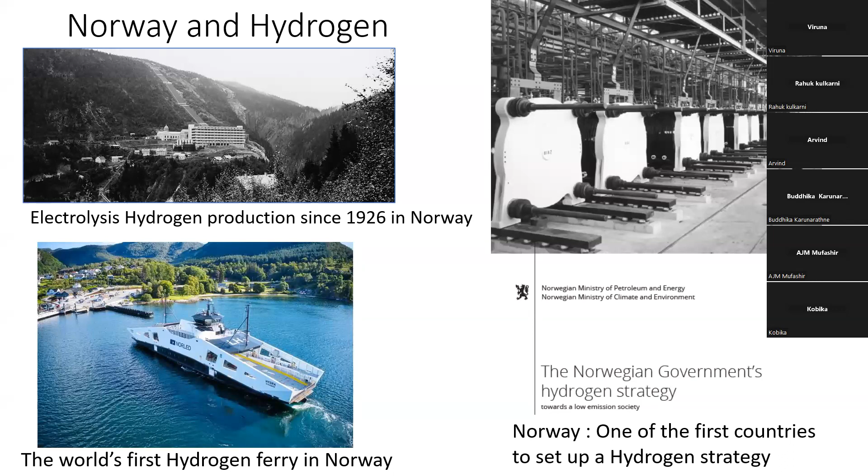Norway has the ambition to become carbon free by 2050, and before 2030, Norway aims to reduce carbon output by 55% compared to 1990. So hydrogen is going to play a big role, and Norway has focused on hydrogen.

We have established two different environment-friendly energy research centers on hydrogen and ammonia in Norway. One is called HyValue, and the other is HYDROGENi. We, HVL, are part of HyValue, so my colleague will explain what we are working on in these energy centers later on.

As far as these courses are concerned, we have been offering three courses in Norway: hydrogen for decision makers, hydrogen for management and administration, and hydrogen for technical personnel. Today we are going to offer this course for Sri Lanka and India, and we will see how we go further from here. The objectives and details of these courses will be given by my colleague, Dr. Jonathan, later on.

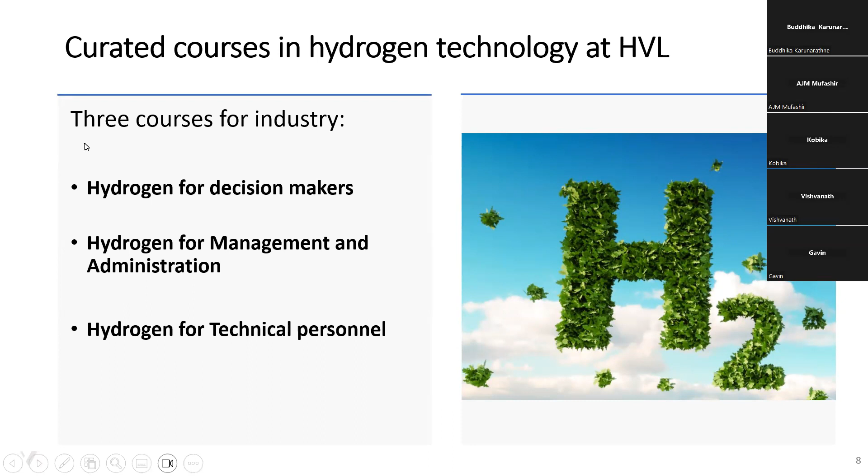Welcome, Velaug. Thank you, Dayalan, for the introduction. It's very nice to be here today and meet some of our friends from India and Sri Lanka again. Thank you for the invitation. We met some of you in India in September this year, and that was very nice. Let me just share my screen first.

I will first give a very brief introduction to our research center, HyValue. I am the center deputy of the center, and I also work as an associate professor at our university, Western Norway University of Applied Sciences.

The Norwegian government launched a hydrogen strategy a couple of years back. This strategy included awarding hydrogen hubs and some pilot projects within a few years, and within 2030, realization of full-scale hydrogen projects in the industry. This hydrogen strategy also included research, so the establishment of dedicated research centers on hydrogen and ammonia.

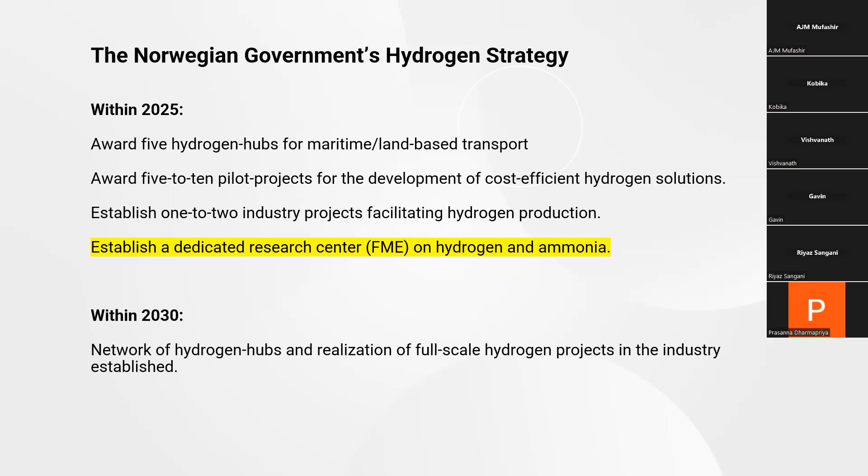Last year, our research center, HyValue, was awarded, and we started our work. This is a research center that is going to last for 8 years, and we are financed partly by the Norwegian Research Council, and partly by own financing from each of our partners. Now let me just organize my screen a bit.

The work that we are going to do is divided into 6 different topics or work packages that together will cover the whole value chain of hydrogen. When establishing hydrogen technology, it's not just technical aspects that are important. We cover everything from novel production methods, through storage technologies, distribution and transport of hydrogen, and all the way to end user applications.

These are the technical areas, but it's also important, if we want to succeed, to look at the whole picture. So we have also included safety and risk science aspects: how can we build this hydrogen economy in a safe way? We have also included social and societal aspects: will people accept this new technology, and how can we embed it in society in the best way? And finally, we have included rules, regulations, business models, and markets: how can one do this in a way that is profitable?

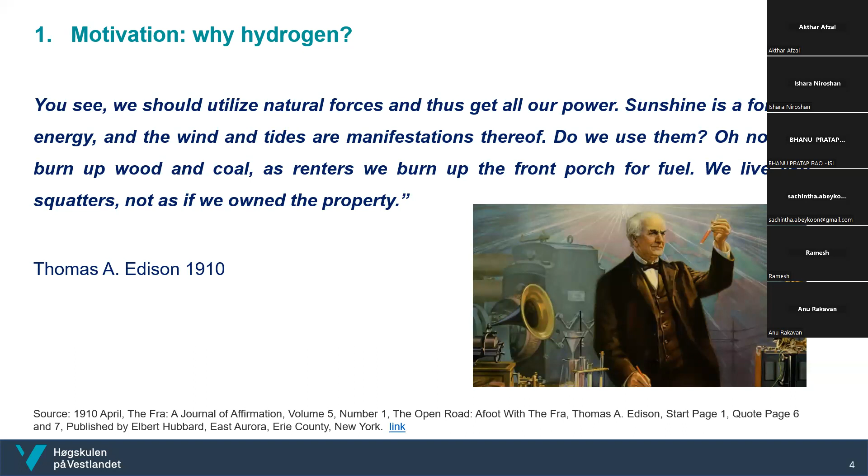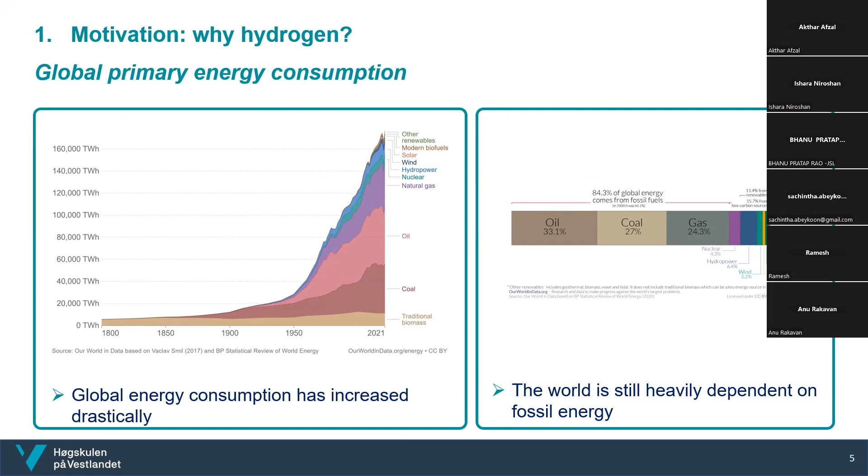So now let's see if anything has changed since the Edison times. The global energy consumption has increased drastically in the last century, and it will continue to grow. And if we look at the distribution of energy consumption by energy type, it is clear that the world is still heavily dependent on fossil energy. Oil and coal are the dominant energy sources, with gas in third place.

But we could no longer burn our own front porch for fuel, as Edison said, and therefore countries all over the world set efforts to reduce their greenhouse gas emissions. Norway and the European Union set the goal to reduce CO2 emissions by 55% by 2030 and to establish a sustainable transition to net zero greenhouse gas emissions by 2050. India announced in 2021 that it aims to reach net zero emissions by 2070 and to meet 50% of its electricity requirements from renewable energy sources by 2030.

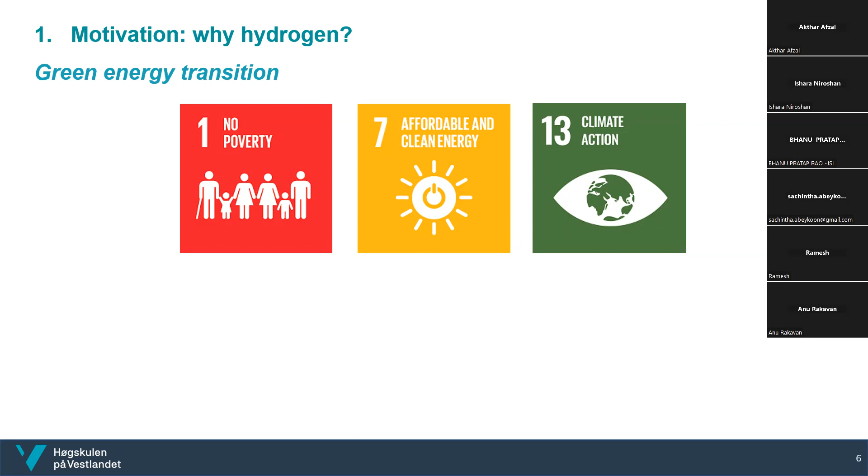And the Sri Lankan government set a goal of achieving 70% of renewable energy generation by 2030, and it aims to become carbon neutral by 2050. The use of renewable energy sources is essential to ensure a sustainable future, but renewable energy is intermittent, and green hydrogen could be the solution to the intermittency issue of renewable energy.

Hydrogen and hydrogen carriers would also allow transport of energy from regions with abundant solar and wind resources to energy-hungry regions, as for example from Norway to Europe or from Australia to Japan. It's also been discussed that India can export green hydrogen to Europe. Hydrogen will also contribute to decarbonization of transport, especially for heavy duty or long distance transport, and for the decarbonization of industry, both as energy carrier and as feedstock.

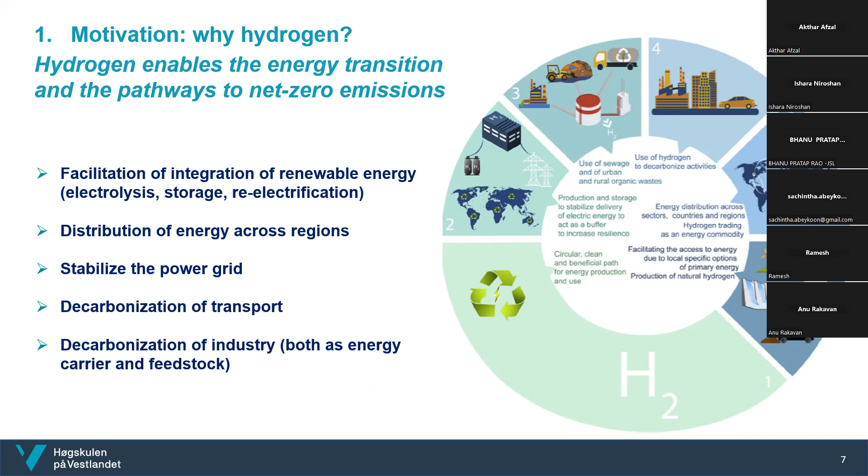But what is actually hydrogen? Hydrogen is element number 1 in the periodic table of elements. It is the lightest element. A hydrogen atom consists of a negatively charged electron, which is orbiting a positively charged proton.

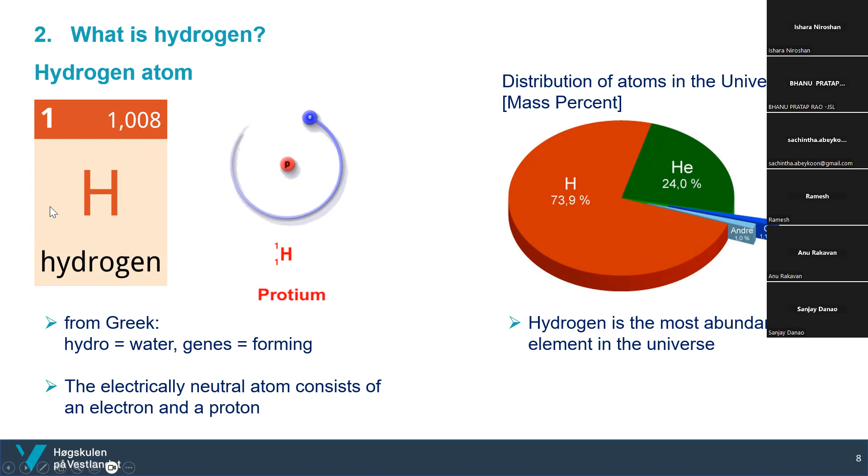Hydrogen is the most abundant chemical substance in the universe, and in mass percentage, hydrogen makes up 74% of all atoms in the universe, and over 90% by number of atoms.

Stars, such as the sun, are mainly composed of hydrogen in the plasma state. Hydrogen plasma consists of hydrogen ions, separate protons and electrons. The sun's energy production is the result of the nuclear fusion of hydrogen to helium. Every second, 4 million tons of hydrogen are fused on the sun and converted into helium and energy. So hydrogen warms up our Earth.

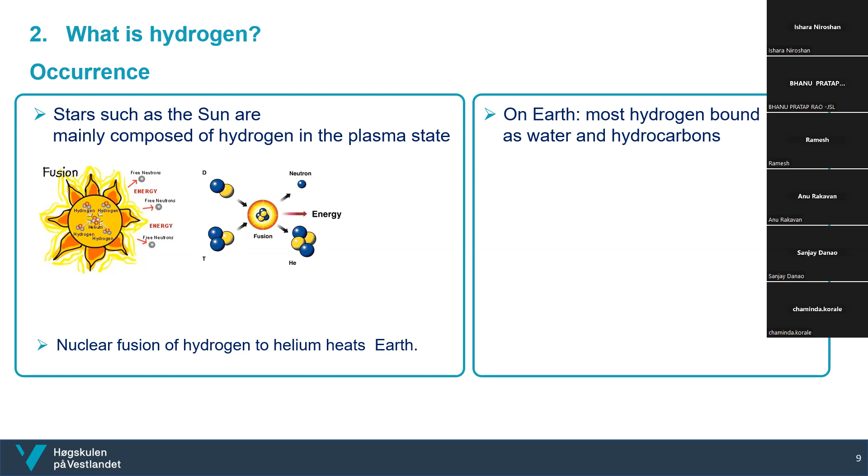On Earth, most hydrogen is chemically bound as water and hydrocarbons. And even in our body, the third most common element by weight is hydrogen.

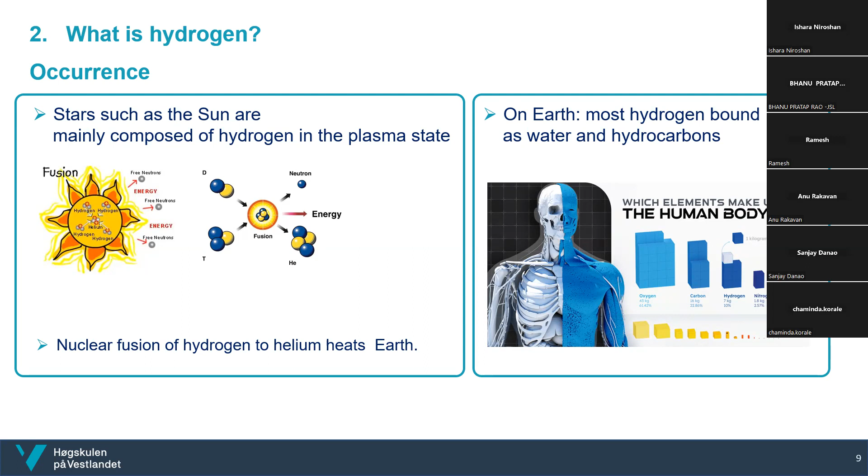But hydrogen, about which we will talk today, is molecular hydrogen or dihydrogen, because it consists of 2 hydrogen atoms. Two hydrogen atoms come together and share their 2 electrons in a covalent bond. So molecular hydrogen, or the H2 molecule, consists of 2 hydrogen atoms sharing their electrons.

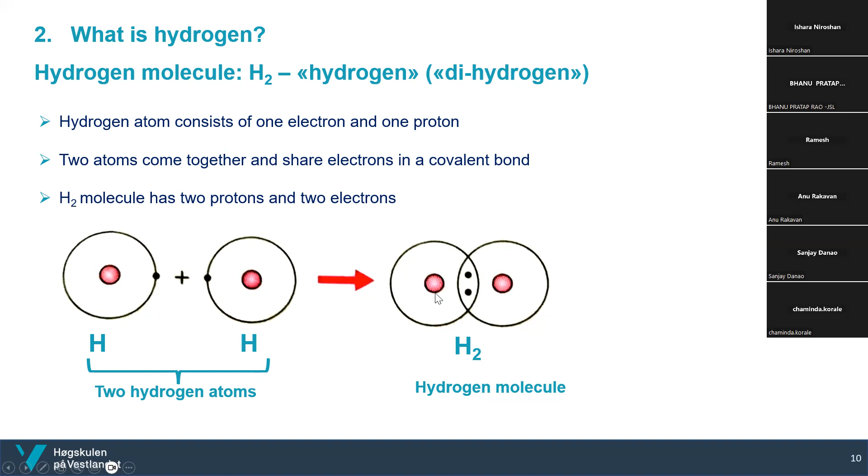A little bit about properties of hydrogen. It is a colorless, odorless, and non-toxic gas under normal conditions on Earth. It has minimal health hazards as a gas. However, it can lead to suffocation by substitution of oxygen, or if we have liquid hydrogen, it possesses a cold burn hazard.

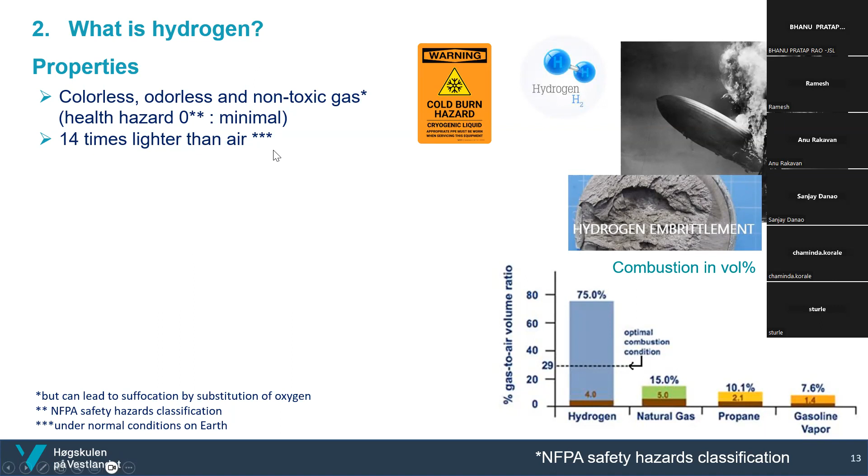Hydrogen is 14 times lighter than air, and this also influences how it behaves. For example, if there is a hydrogen leak, hydrogen will very quickly mix with air, and the mixture is extremely explosive. But at the same time, if the leakage happened outside, hydrogen will disappear very soon, and the hazard will be lowered.

Hydrogen molecules are very small, and therefore it is very difficult to design equipment which is hydrogen tight. It leaks easily, and as it is a colorless, odorless, and non-toxic gas, it is difficult to detect hydrogen leaks without special sensors. Also, small hydrogen molecules easily penetrate into the crystal structure of different materials, for example metals, and it leads to mechanical failure of the materials, so-called hydrogen brittleness.

As I already mentioned, hydrogen is extremely flammable. It has extreme fire hazard. It is combustible in a wide gas-to-air volume ratio. If we look at this diagram, which shows the gas-to-air volume ratio where it is flammable, hydrogen is flammable between 4 to 75 volumetric percent. And for example, natural gas is only flammable from 5 to 15 percent.

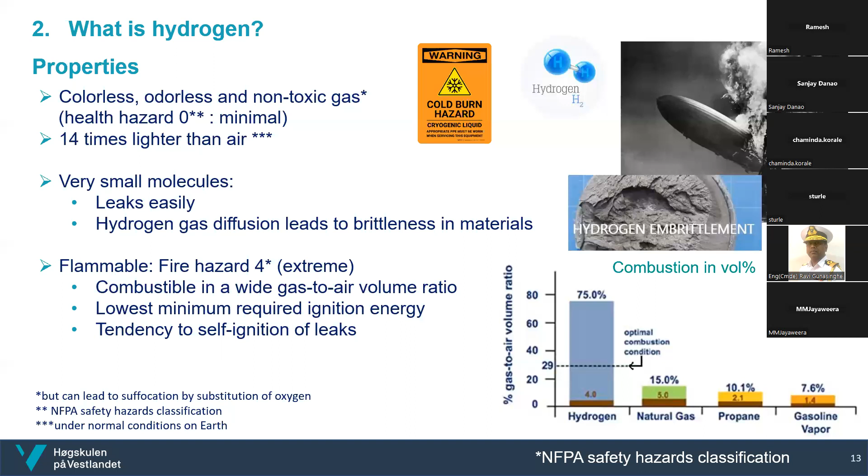Also, hydrogen requires a minimum energy for self-ignition if compared to other gases, like natural gas or propane. So leaks also have a tendency toward self-ignition.

If we look at the table with properties of hydrogen compared to properties of methane, we can see that the boiling point of hydrogen is almost 100 degrees C lower than for methane. So hydrogen has the second lowest boiling point and melting point of all substances, only after helium. It means that it is extremely energy intensive - we need to put a lot of energy to liquefy it.

Also, gravimetric energy density, that means energy per kilogram of hydrogen, is at least 2 times higher than for methane. It has very low volumetric energy density, that is energy per liter of hydrogen, and this is due to its low gas and liquid densities. As a result, we get a low volumetric energy density, so the energy density of hydrogen is almost 3 times lower than that of liquid natural gas.

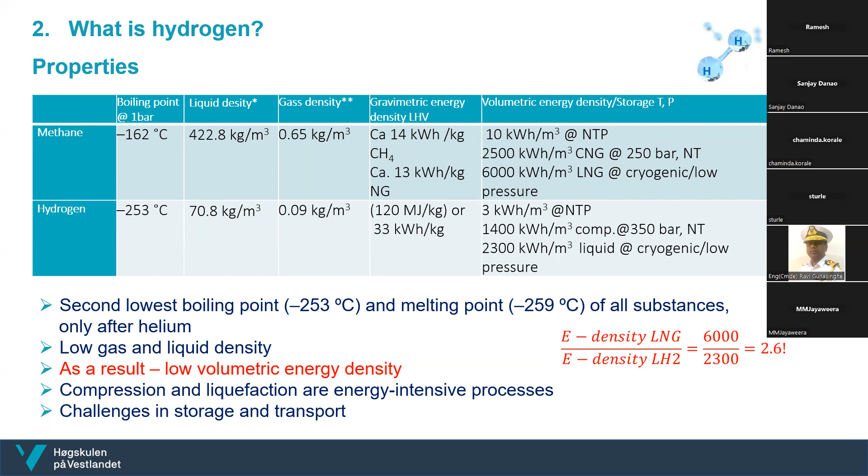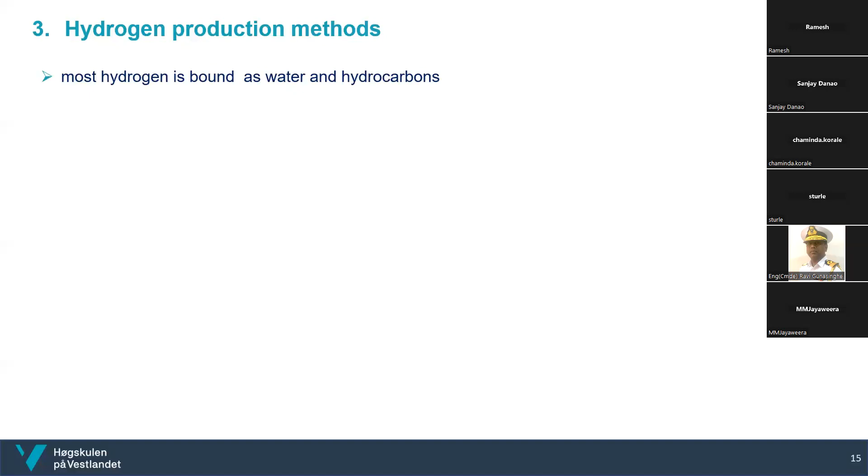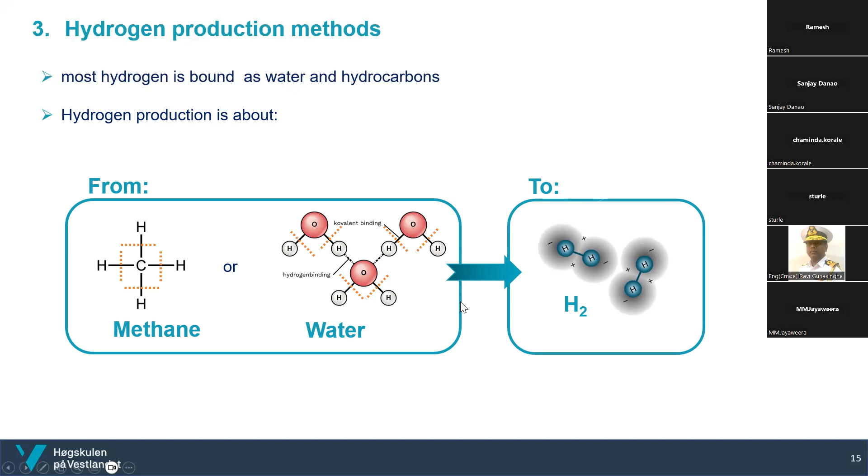Most of the hydrogen is bound as water and hydrocarbons on the Earth, as I have already mentioned. Therefore, hydrogen production is about going from hydrogen carriers to hydrogen, and this requires energy.

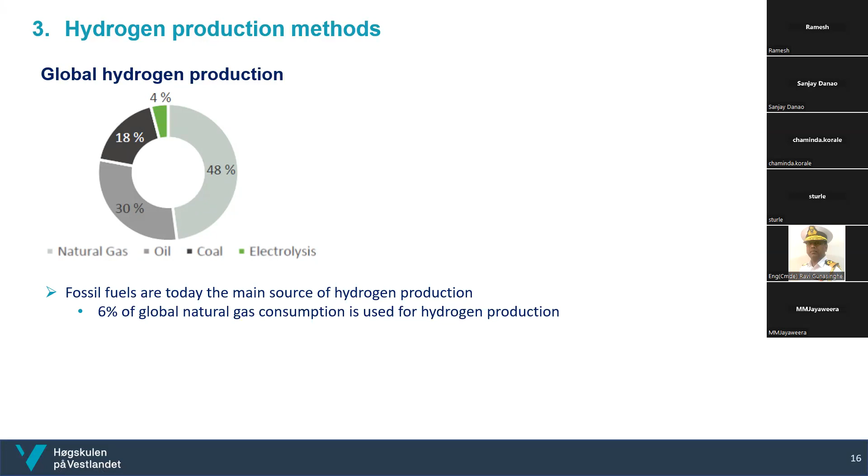At the same time, 6% of global natural gas consumption is used for hydrogen production. And more than 50% of hydrogen which is produced is used to produce ammonia.

The availability of green hydrogen, as you can see, is very limited, and the reasons for this are that we need to increase renewable energy production, and we need to reduce the cost of electrolyzer technology to reduce the cost of green hydrogen.

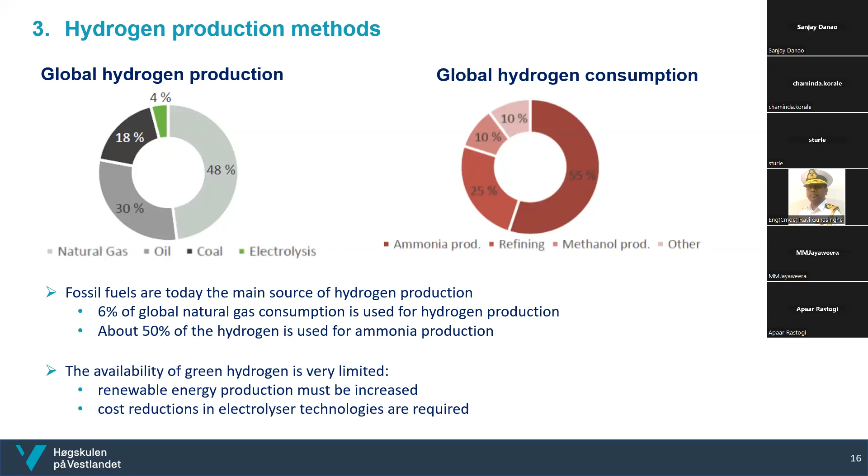Hydrogen comes in different colors depending on its production methods. This rainbow classification of hydrogen production methods is not very strict for some of the colors, but black, brown, green, and blue colors are used consistently. Black and brown hydrogen is from gasification of coal.

Gray is for steam methane reforming, and it is the most widely used process for generation of hydrogen. Blue is also steam reforming of natural gas, but with CO2 capture.

Turquoise hydrogen comes from pyrolysis of natural gas. Yellow comes from electrolysis using electric energy from the grid, so mixed energy, both from renewable sources and fossil. Pink hydrogen is produced with water electrolysis using electricity from a nuclear power plant.

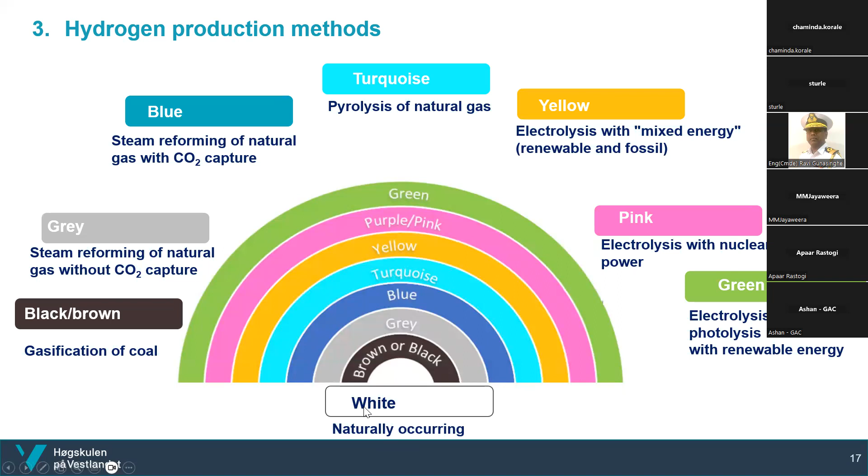Now we will have a closer look at these hydrogen production methods. But first, I will start with naturally occurring hydrogen.

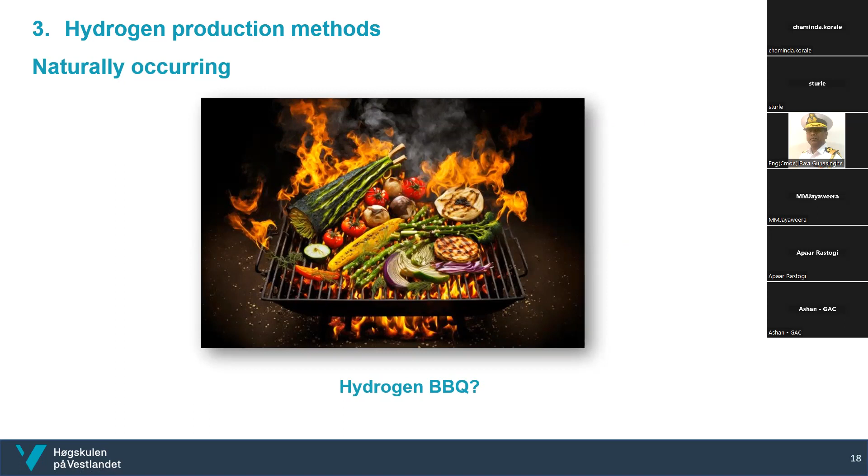And I know at least one nice place for barbecuing with hydrogen. In Turkey, there is a mountain which is called Chimera. The mountain is named after a fire-breathing creature from ancient Greek myth.

On this mountain, a hydrogen-rich natural gas seeps to the surface and gets ignited spontaneously in the sun. These chimera flames are the result of metamorphic activity releasing the gas. And these flames have been burning for thousands of years, and they are believed to be the source of the first Olympic flame in the Olympic Games in ancient Anatolia.

And now Chimera Mountain is a popular touristic location where tourists come, for instance, to barbecue their food on hydrogen. But many of them don't even realize that it is hydrogen what they use for grilling.

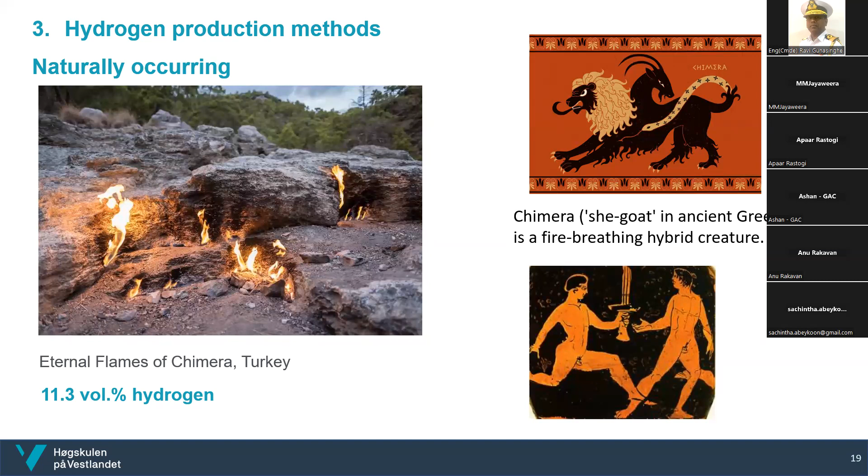So here are just two examples: barbecuing is very popular in Australia, and that's why the University of Sydney developed the world's first hydrogen barbecue, which is now commercially available. And the Tokyo Olympic flame was also inspired by this lighting torch by hydrogen in ancient Anatolia. So the Tokyo Olympic flame in 2020 was the first powered by hydrogen.

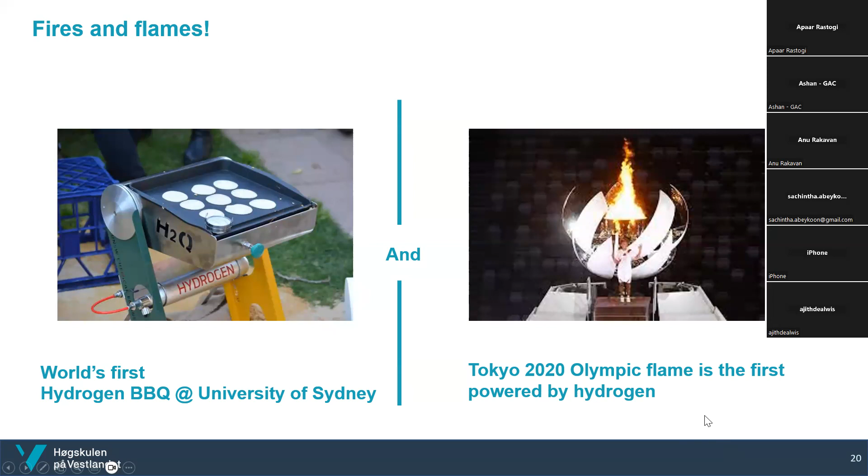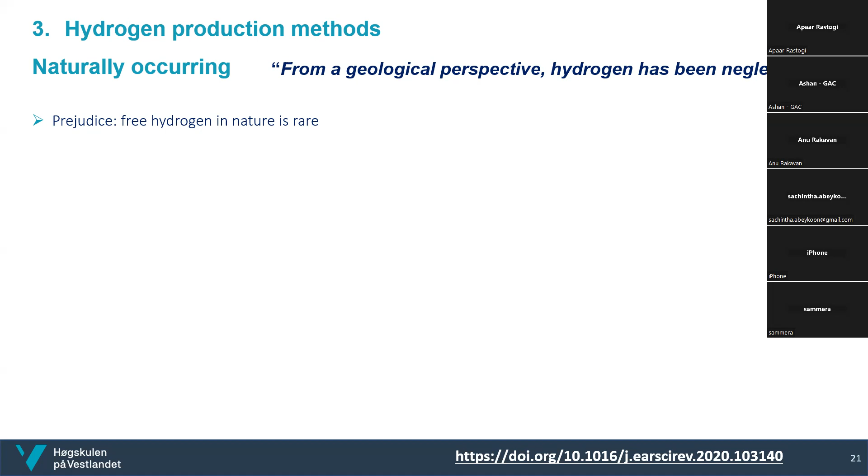There has been a prejudice that free hydrogen in nature is rare, and the reason for it is that in gas chromatography, hydrogen is often used as carrier gas, and gas chromatography is used to analyze gases in nature. There are only a few modern portable gas analyzers which include hydrogen sensors in their design. Therefore, it is difficult to estimate how many times hydrogen hasn't been identified in hydrogen-rich samples due to the lack of suitable detection techniques to measure hydrogen concentrations.

Also, there are several processes involved in natural hydrogen formation, and some of them are also not well understood yet. For example, naturally occurring hydrogen can originate from the Earth's mantle or core. In the Earth's deep mantle, hydrogen is stored in minerals, and at the conditions in the Earth's mantle, there is high pressure and high temperature, and hydrogen is released from these hydrous minerals.

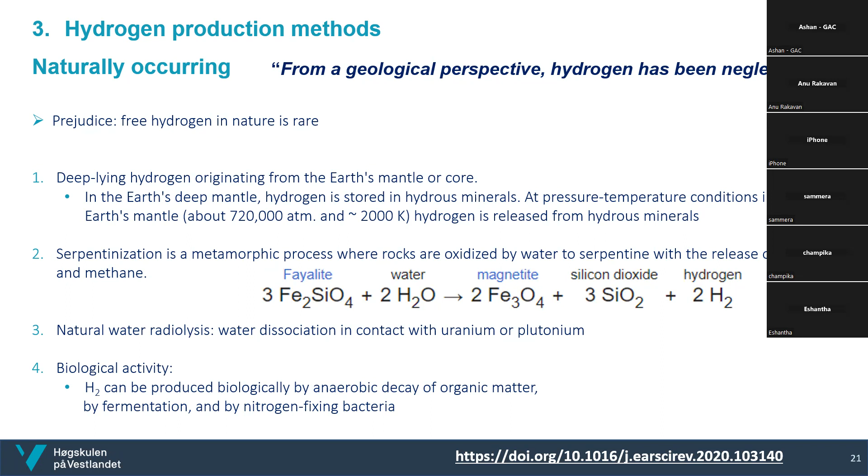So naturally formed hydrogen appears as a promising carbon-free and abundant source, but there is a low level of research on this topic. Therefore, it is difficult to say how much white hydrogen we have worldwide, and it is also difficult to estimate which infrastructure is required to exploit it, and how sustainable this process of mining white hydrogen will be.

In different countries, there are a number of initiatives where the scientific community and industry come together to exploit this possibility of mining natural hydrogen. One example is a European initiative for subsurface hydrogen.

And for example, recently in France, in the Lorraine area, a large hydrogen deposit was discovered, which is believed to be the largest in Europe, but it is still unclear how to extract it.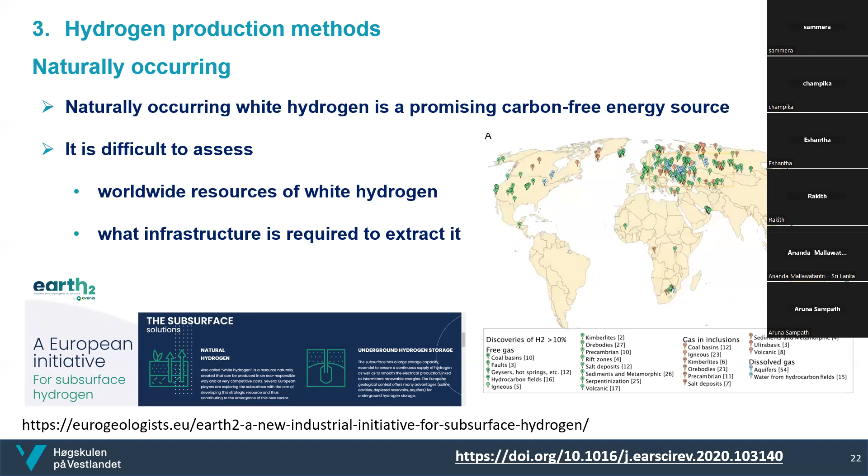Now we come to the next two colors of hydrogen, which we briefly mentioned: gray and blue hydrogen. Both come from steam reforming of natural gas. Gray is steam reforming of natural gas without carbon capture, and blue hydrogen is with carbon capture.

Steam methane reforming is a process in which methane from natural gas is heated with steam, usually using catalysts such as nickel, and a mixture of carbon monoxide and hydrogen is produced.

Then there is another step in this process, called the water gas shift reaction, where carbon monoxide reacts again with water to produce more hydrogen and carbon dioxide.

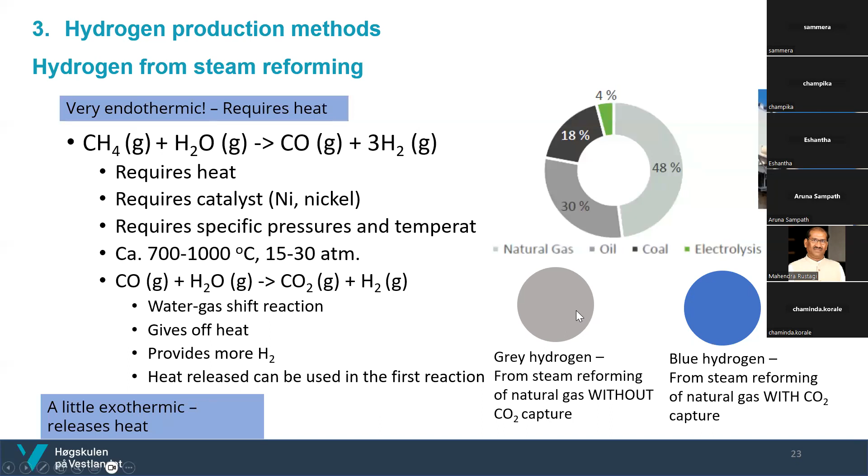And I wanted to mention that 80% of all hydrogen produced today is so-called gray hydrogen.

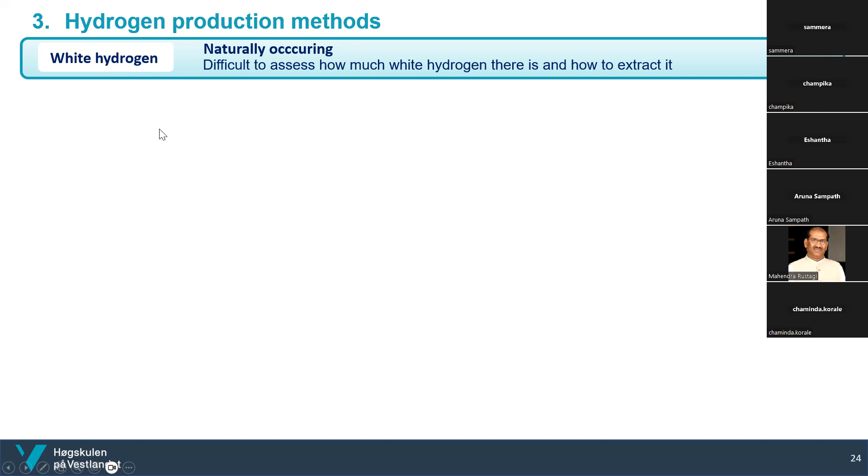Now we will have an overview of these production methods, which I briefly mentioned. So white hydrogen is naturally occurring, and we don't know how much white hydrogen there is in the world and how we can extract it.

And then from fossil fuels comes gray and blue hydrogen, both from steam methane reforming, one gray without CO2 capture and blue with CO2 capture. So steam methane reforming is a two-step process consisting of reforming and the water gas shift reaction.

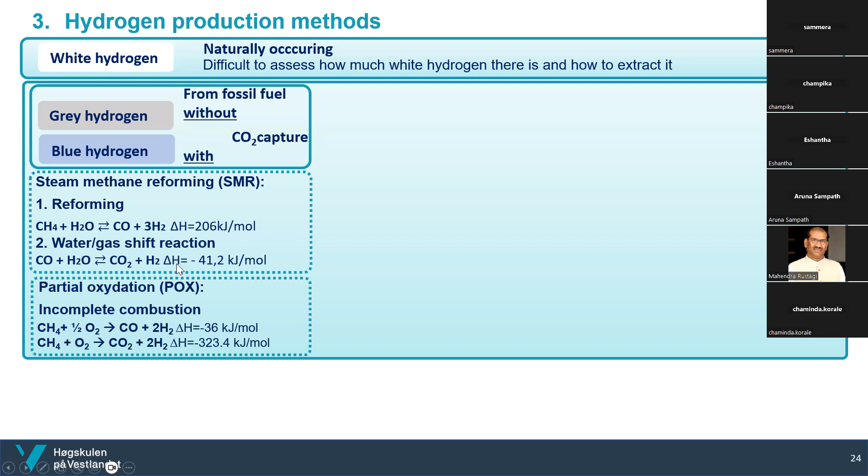Another method to obtain hydrogen from methane is partial oxidation. A catalyst is also needed here, and methane is incompletely combusted with oxygen.

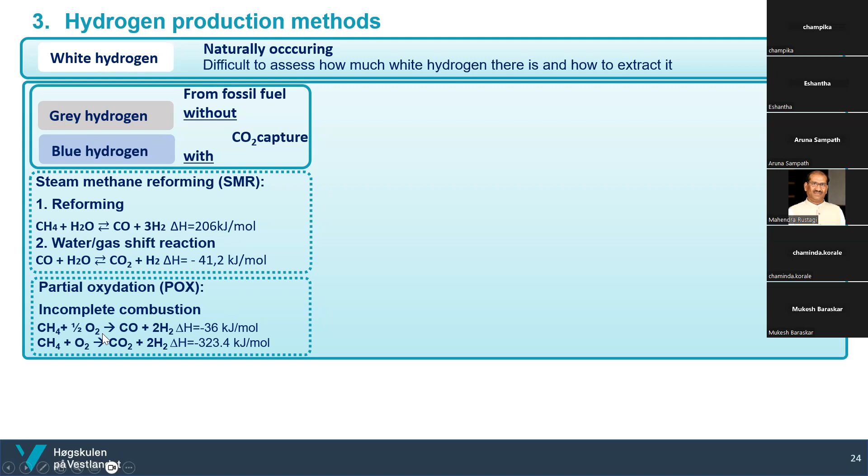The next method is autothermal reforming, which combines steam methane reforming and partial oxidation in one process. Steam methane reforming is an endothermal process that requires heat, and partial oxidation is an exothermal process that gives off heat. When we combine these two processes, the heat from partial oxidation can be used for steam methane reforming, and the process becomes more efficient.

The last two methods of hydrogen production from fossil fuels are gasification of coal and pyrolysis of natural gas. Gasification of coal is the oldest method of hydrogen production, and 18% of hydrogen nowadays is produced with this method.

The last method is turquoise hydrogen, which is pyrolysis of natural gas. In the pyrolysis process, methane is directly separated into hydrogen and solid carbon. Solid carbon is much easier to handle than the gaseous carbon dioxide produced in steam methane reforming, and it is also a valuable product for industry.

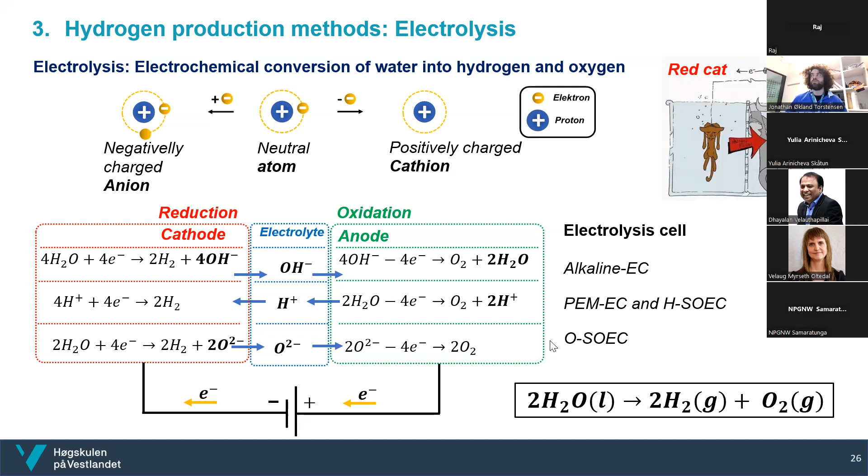I think this gives a proper overview, and this is the most important to know: what we are interested in is not the chemical reactions, but the operating temperatures. If we look at the low temperature electrolyzers, they typically are good because they require not that much heat to operate. This is good in combination with, for instance, a variable power source, because to use this you need to put on some power.

As Dhayalan said, 100 years ago in Norway we used alkaline electrolysis. It has gained a lot of attention because it uses a catalyst that is very common - nickel is a very common metal. It has a relatively high efficiency, and it's one of the most common techniques in terms of electrolysis to produce hydrogen.

Some of you have heard about PEM electrolysis, which is maybe the more modern cousin of low temperature electrolysis. It's the same principle, but here the catalysts you use are noble metals, and this is a problem, because you need to typically mine them from somewhere, which is a disadvantage both in terms of the fact that they're not as abundant, and that mining has some very bad consequences for the environment. So in the low temperature space, it's a competition between PEM and alkaline.

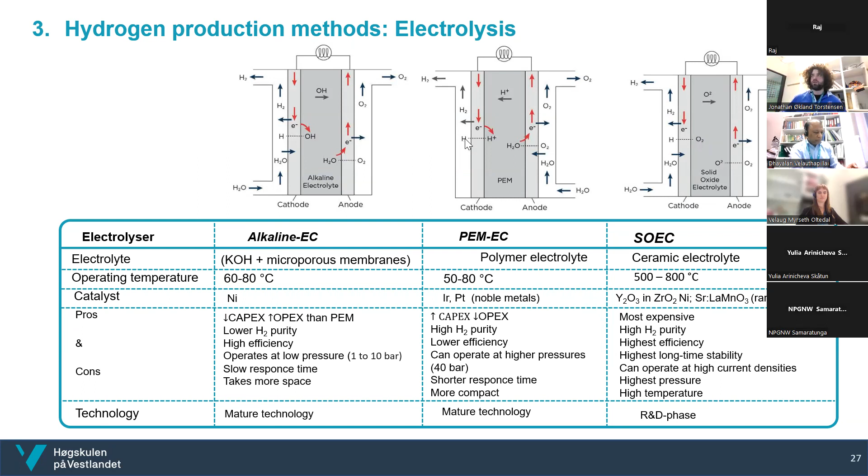Electrolysis is very nice to use with, for instance, a variable power source. And one of the variable power sources we have is offshore wind. And then I would like to give the word to you, Velaug, to tell us a bit about offshore wind.

Yeah, thank you. Thank you, Jonathan.

So like Jonathan and Yulia said, most of the hydrogen today is produced from natural gases, from fossil fuels, and this releases a lot of CO2. So if we in the future want to make this into a green industry, we need to produce hydrogen using electricity and using clean electricity. So this means that if we're going to have electricity for producing hydrogen, and also then electrify different sectors, we will be needing a lot of new additional clean energy. And one of the new energy sources that are emerging now is offshore wind.

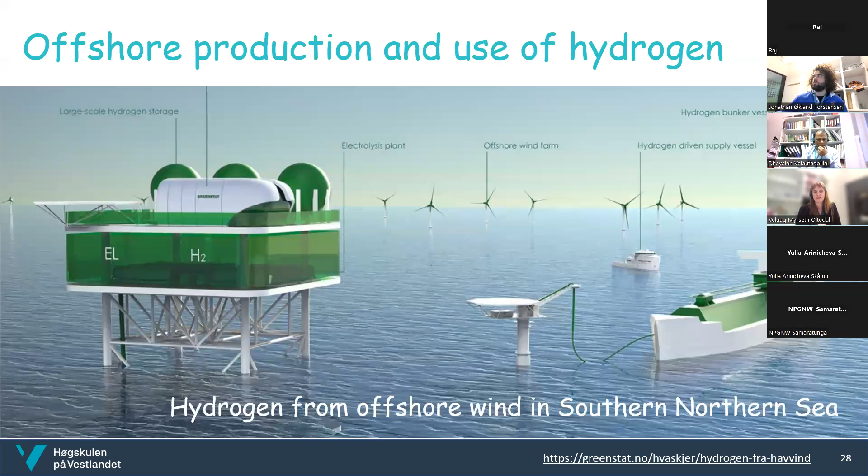Next slide, Jonathan. So we are looking into different research aspects of how to produce hydrogen, either from an offshore wind farm or from what we call trapped power.

So trapped power is - in Norway, we have this situation along the coast where many of our hydropower plants have the possibility to produce a lot of power, but our grid is not strong enough, so we can produce more power than we can actually transport away from the hydro plants. This means that a lot of the hydro plants are not producing as much as they can, or they're not producing at all because the grid is not ready. And then one possibility is to install an electrolyzer on site close to the hydropower plant and produce directly from there.

And then we are also looking into different aspects of hydrogen production from offshore wind, and also how to store it. Hydrogen is a bit difficult to handle because it takes a lot of space to store hydrogen gas. Or like Yulia said, if you want to have it as a liquid, you need to cool it down to extremely low temperatures, minus 253 degrees Celsius. So it's difficult to contain pure hydrogen, but there are some alternatives that I think my colleagues will talk about later. You can transform it into, for instance, ammonia, that is easier to handle, and then we are looking into different options - what is the best way to store the hydrogen offshore?

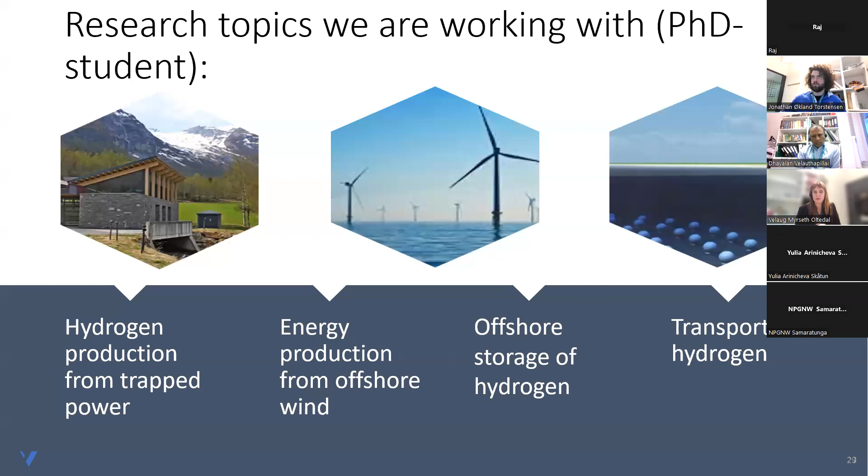Please, Dhayalan. Thank you, Ella. Thank you, Ella. Thank you, Jonathan.

As both Yulia, Jonathan, and Bela pointed out, actually now the majority of the market, as far as market is concerned, is gray hydrogen which dominates the market. But of course it is very cheap as well compared to other hydrogen production technologies.

So we are focusing on two things: one is electrolysis, the other one is photoelectrolysis. The thing is, as everybody pointed out here, the primary concern now is if hydrogen could be competitive to other technologies, the prices of production of hydrogen must come down drastically. That is important. Now the green hydrogen, which is produced by electrolysis, costs nearly 4 times compared to the gray hydrogen.

So that is the challenge we all face. We had to work on different types of technologies such that we could reduce the prices. That is the primary thing.

So we are working on electrolysis. We are working on, as Jonathan pointed out, the PEM and alkaline based hydrogen technologies. But there, of course, as Jonathan said, we are using iridium, platinum, palladium, these types of expensive materials. So we have to work on materials which could be cheaper. That is one thing we have to work on the electrodes.

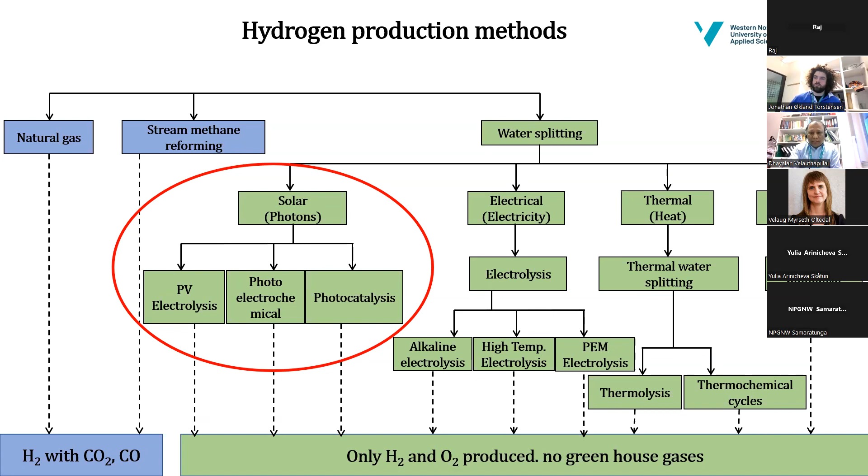So we are focusing on two things. One, of course, electrolysis. We are working on alkaline and PEM electrolysis, but we are working on the electrode materials. We want to make cheap materials which could replace platinum, gold, silver, and iridium, and so forth. So we have collaborations both in India and Sri Lanka working on these new materials.

The second thing, we are trying to work on solar energy directly to produce hydrogen. We call it photocatalytic hydrogen production or photoelectrochemical green hydrogen production. So what we do is we are working on nanomaterials which could absorb the sunlight, and in reaction with the water, it could produce hydrogen and oxygen. The technique is very simple, such as photosynthesis.

What happens is you have a nanomaterial which absorbs the sunlight. It's a semiconductor material. The electrons from the valence band come to the conduction band, and it leaves the holes behind. Then the electrons go into the water, and you produce hydrogen, and of course holes with the water, and you produce oxygen. This is the simple technique we use, but this is a known technique people have been working on for the past 50 years.

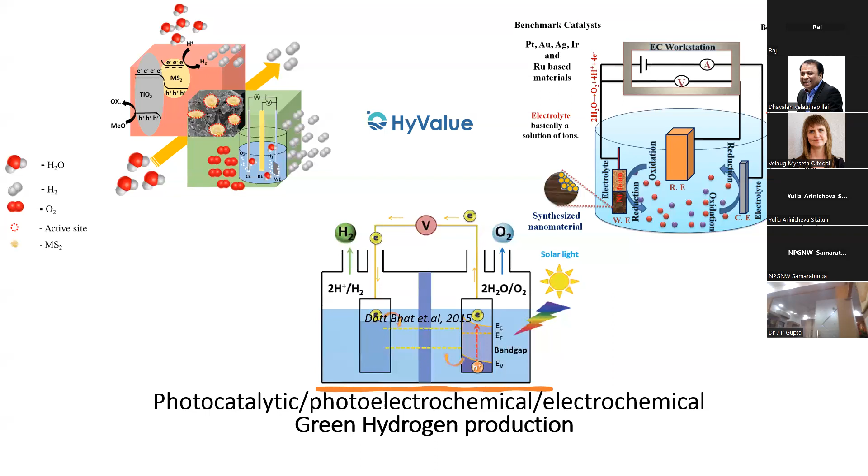Let's now imagine that we have produced our hydrogen. We could use natural gas for steam reforming, for instance, to decompose it into hydrogen. Or we can use electrical power, as Velaug said, from offshore wind or from a waterfall and do electrolysis with this, and then make hydrogen. But the question now is how to store it. And obviously, storage is a complicated field with a lot of possibilities.

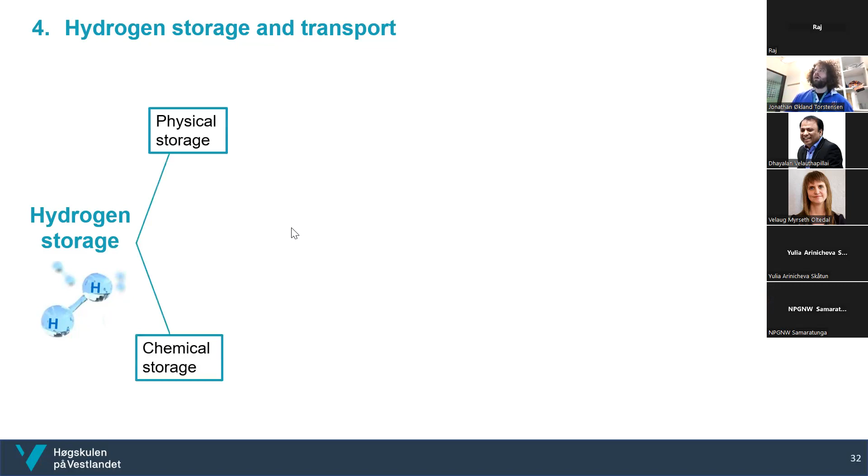We have many ways to store hydrogen, but we typically divide them into two categories: physical or chemical storage. Obviously, we can have it as compressed hydrogen, and now you understand why we need to compress it, because hydrogen has a really low density. So if we do nothing, we will have no hydrogen molecules in our volume. We can liquefy it. We'll see shortly that this is a really complicated process, but it gives us even higher hydrogen density. Or we can adsorb it onto, for instance, a particle or inside a metal.

So if we do physical storage, these are the typical methods for compressed and liquid hydrogen. Now, they have some disadvantages, and that's the fact that if you have a container with compressed hydrogen, you can have a leak. So another possibility is to do chemical storage.

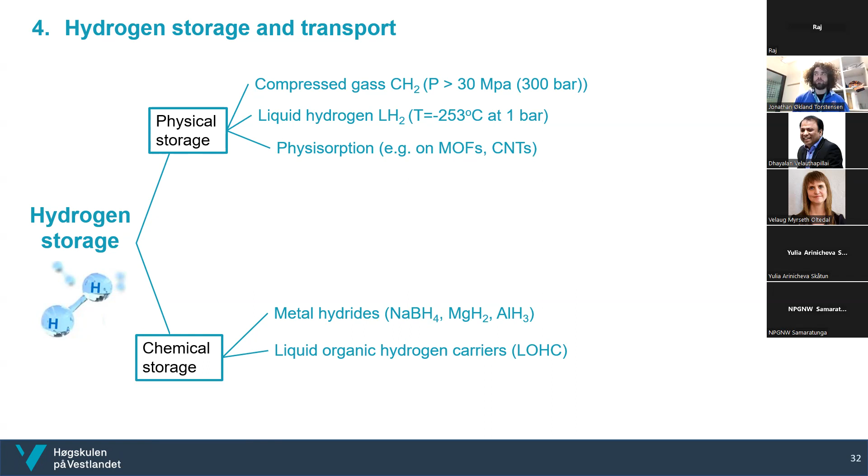Now, chemical storage can be like this. We can use metals and put hydrogen inside the metal. Or we can use a class of organic molecules called liquid organic hydrogen carriers. The illustration is here to your right. You have some molecule, and by using a catalytic reaction, you can either load it or unload it with hydrogen. So it's like a reversible hydrogen storage medium, like a battery, and you can compare it to maybe an olive oil, where you put hydrogen in or take hydrogen out of.

Lastly, you can convert the hydrogen to, for instance, ammonia or methanol. The good thing with ammonia is that we have used it for a long time, so it's more mature and in that sense, safer for us.

Remember that when we use hydrogen, we need to be careful about its purity. We will see later that we can use it in a fuel cell, and then we need a high hydrogen purity to not destroy the fuel cell. But we also need a high purity when we store it. So in our system, we have a lot of components that can be destroyed or disturbed by impurities. For compressed gas, we need a relatively high purity, but for liquid, even higher, and the reason for that is the liquefaction temperature.

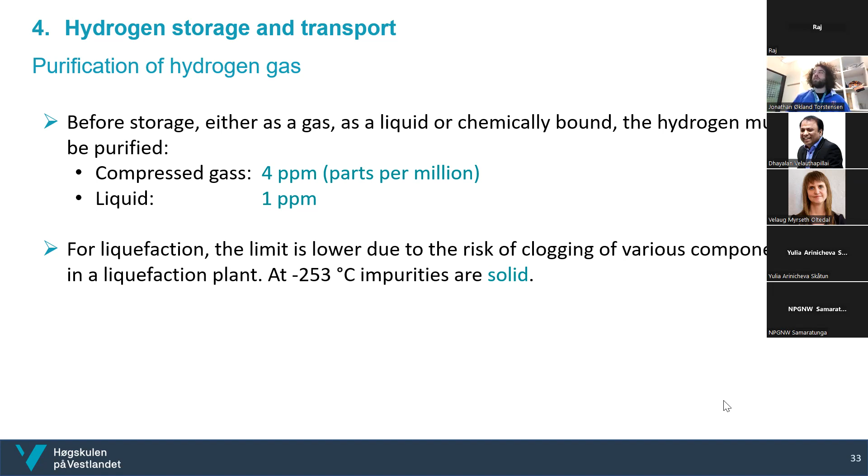So we need to get down to minus 253 degrees Celsius, which is 20 degrees above absolute zero. At this point, everything freezes. So we need to be really mindful of the fact that we have a highly pure hydrogen.

How do we do this? For hydrogen storage and transport, we can obviously use compressed or liquid. In the case of compressed, we are lucky; we can use regular compression methods, which we can use for any type of gas. But we also have some really advanced compression methods that are new, maybe, in terms of hydrogen. The good thing about these compression methods is that since they are particular for hydrogen, they make this compression technology even more versatile.

If we compress it, we can store it in different places, and this depends on your use. In the case of underground storage, we imagine that we need a lot of hydrogen - we don't use this for small quantities, but for large quantities, and you see here that it's fairly high pressure. Now, what is the problem with this underground storage? It's the problem that you might get some impurities in your hydrogen, which can be problematic for your end use. So there is some research effort going into investigating: if you put hydrogen into this reservoir - it can be an old reservoir used for oil and gas, or it can be a salt cavern or whatever - will the hydrogen that you store there be destroyed by bacteria or other bad stuff inside your reservoir?

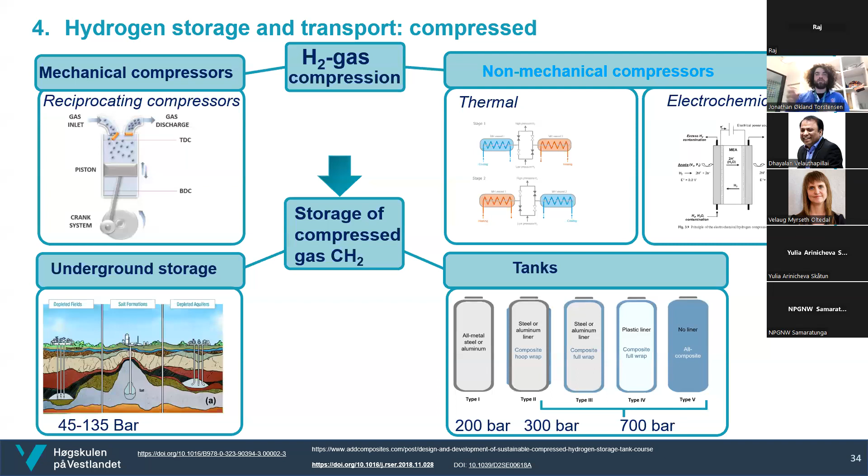Another possibility is to liquefy hydrogen. In the world today, we have two main ways of doing it: the helium-Brayton cycle or the Claude cycle. These cycles are industrial processes that exist in the world today.

For instance, in Norway at this point, we have no liquefaction possibility. Dhayalan showed the picture of the Norled ferry, and it uses liquid hydrogen. So the question is, where does it come from? It comes from a truck from Germany.

What is important with liquefaction is that we really need to have a fairly large scale for it to be cheap enough. As you can see here, typically we divide these facilities into small or large scale, and we set the separation limit at about 3 tons per day.

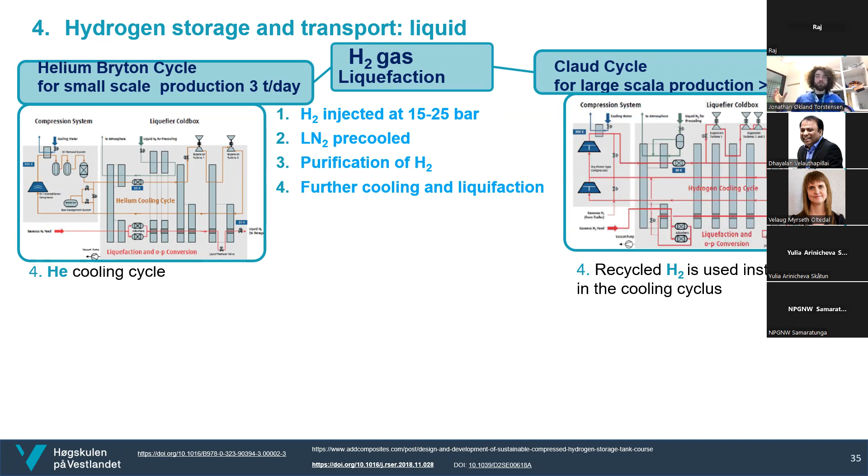It's actually very difficult to get down to minus 253 degrees Celsius. No matter how we do it, we can use liquid nitrogen for pre-cooling, but then we need to cool the gas even more, using helium or hydrogen. But in the end, to get down to minus 253 degrees Celsius, we need to use some advanced method. It's not enough to cool hydrogen with other gases.

So this is a highly specialized process which requires a big infrastructure. You can see here on the process schemes that it's not an easy thing to do, requiring a lot of pumps and valves and purification of the gas.

So what are the most important things to know about small scale versus large scale production? Obviously for small scale, we have relatively low capex, like investment costs, but high operating cost. For large scale, it's different: the plant is more difficult and expensive to build, but it has lower operation cost. As a general rule, the larger the production volume, the cheaper it is in the long term.

However, these two process facilities are not easily built. What you will see later is that we need to be really careful about how we set up our production, because what is the point of liquefying hydrogen if you have no end customer? You can also imagine that if you produce a lot of liquid hydrogen, your end customer needs to be within a certain distance, because this liquid hydrogen is at minus 253 degrees Celsius, so it doesn't stay liquid forever.

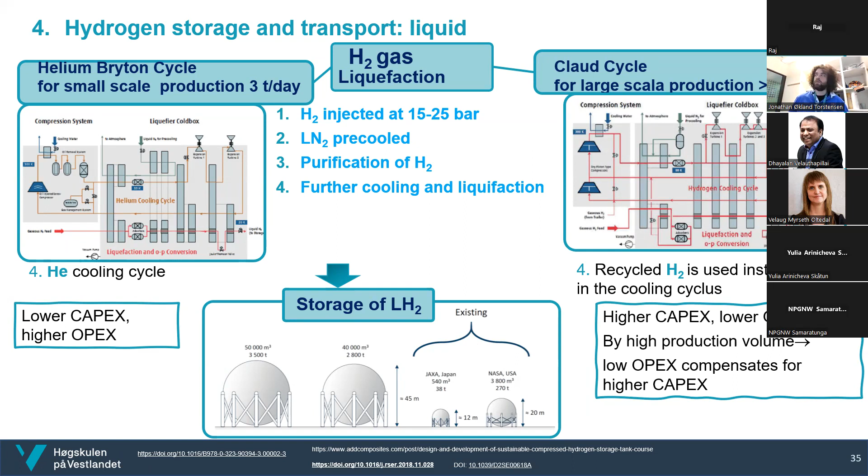Then the obvious question is, why do we liquefy hydrogen? It requires a complicated infrastructure for this plant, really difficult compared to just compressing it. With compression, you can use regular methods, but you see the answer here.

If you care about the size and weight, that matters for transport, but not only for transport, also for end use. Let's say you want to use this on a boat. Maybe you will not have this volume available, so then you should use liquid. For instance, this Norway ferry uses liquid hydrogen. You can also imagine it's a bit problematic to use liquid hydrogen because it needs to be driven from Germany. But on a boat, you will not have this volume available, you will probably be better off with the liquid form. So it's a complicated weighing of different ways of storing hydrogen and different ways of transporting it, and also where it's produced.

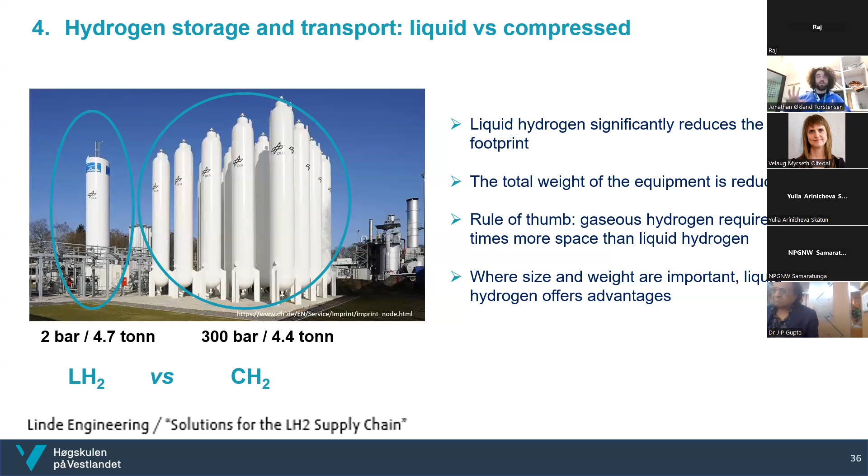Okay, what alternatives do we have? We can also store it as a chemical. The reason for converting it into something else is because we have a lot more experience with, for instance, ammonia or methanol than we do with hydrogen in terms of safety and use, especially in the transport sector.

In the case we need to use pure hydrogen, we need to first make ammonia and then convert it back to hydrogen. This requires some energy that we lose. But ammonia, for instance, is liquid at minus 33 degrees Celsius. It's much easier to handle than minus 253, which you have for liquid hydrogen. Also, methanol, which is another option, is liquid at room temperature.

Ammonia in particular has been used as a coolant for ages, so we have a lot of experience with it.

As Yulia said, hydrogen is not toxic, but ammonia is. So if you smell it, you have a lot of time until it gets dangerous. You smell it at about 5 parts per million - if you have 1 million molecules, if 5 of them are ammonia, you can smell it. Then you start getting problems at about 200 to 400 parts per million. From about 3,000, you die at prolonged exposure. So ammonia can be quite dangerous.

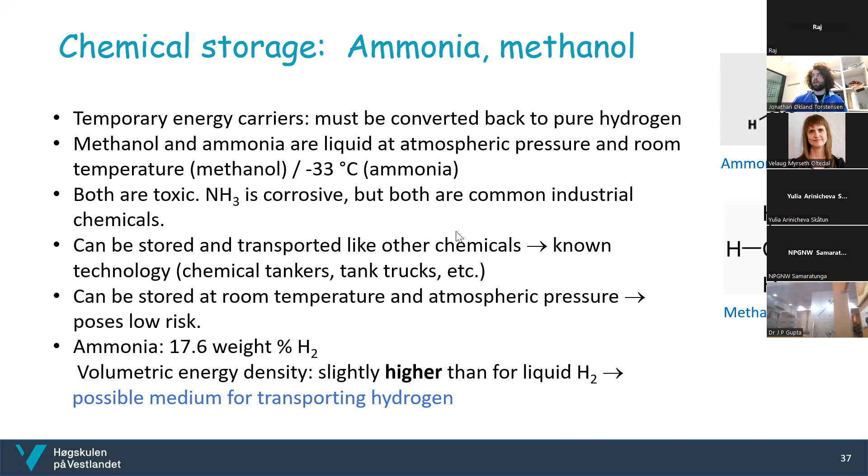The good thing with this is that we can just transport it in a regular manner - we don't need specialized equipment at all. Again, we have this advantage with room temperature and atmospheric pressure, but you see that if you have a kilogram of this loaded substance of hydrogen, it only contains about 7% hydrogen. So a lot of these are other substances, carbon, for instance.

Why do we want to use this? It's good in terms of safety, but it's also good in terms of the weight here. You can see that if we take hydrogen on or off, it doesn't really matter - the weight is almost the same. So if you use it on a ship, for instance, you need a stable weight, and you can use this to compensate for your ship's weight, and you don't lose it as you will do if you use hydrogen.

So if you use hydrogen on a ship, for instance, it will go away. So this remains as a hydrogen carrier on your boat.

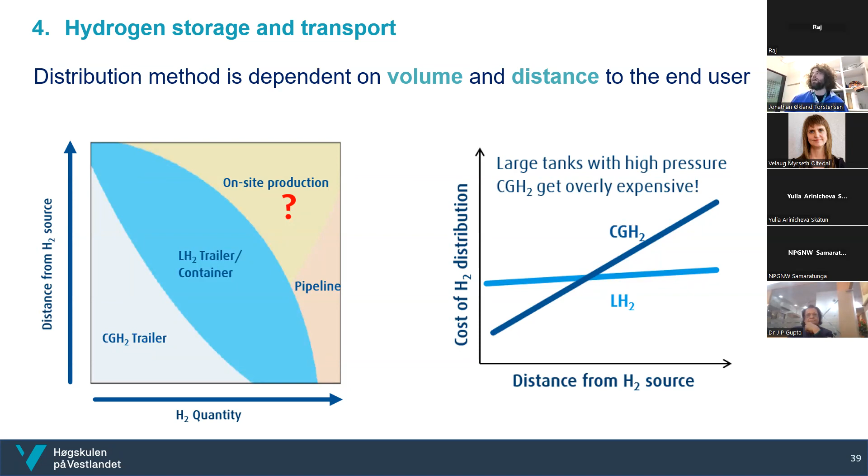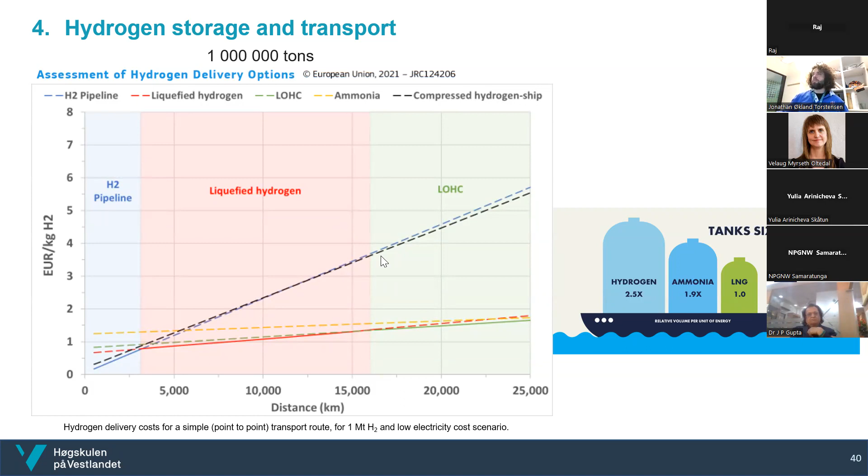For instance, in Norway, our country is more than 1700 kilometers long, and we only have about 5 million inhabitants in this large country. So how can we solve this? Pipeline maybe not such a good idea, because Bergen, the second largest city, has 400,000 inhabitants, but Oslo, the largest, only has 1 million. And you have all these small cities here, with a lot of population spread in between.

For instance, let's say in Norway you wanted to move or use compressed hydrogen—it's about $2 per 500 kilometers per kilogram.

So this is actually an additional cost of about $2 if you transport it. And it's not really viable if you think of hydrogen as a competitive fuel in terms of price.

Now, how can you solve this? One solution is obviously to use localized electrolyzer production. And as you saw, an electrolyzer is just something like this, but obviously much bigger, and you can put some power on it. A good thing about Norway is that we have a lot of mountains, which means that we have a lot of falls, which give us electrical power.

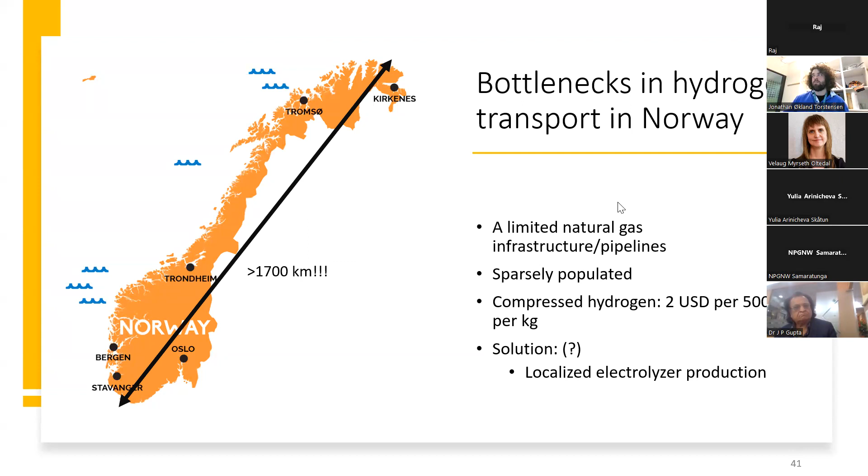Okay. Then we move on and talk a bit about the hydrogen use. This is actually a really, really complicated field with a lot of uses. So what we can imagine, and in this context, we talk a lot about hydrogen in terms of it being an energy carrier for the transport sector. We want to use it in our cars and ships as a fuel. But we should always remember that hydrogen is also a chemical. It can be used as a chemical with the same purpose as a fuel, to reduce CO2 emissions.

Why is hydrogen such a good thing? We have seen it already, but it's nice with a little repetition. It's a very nice match with renewable energy, because renewable energy sources like wind and solar, they go up and down, and we can couple it to hydrogen production and storage and use hydrogen as an intermediary battery when we have, for instance, a power shortage. We can put hydrogen back into a fuel cell and make power.

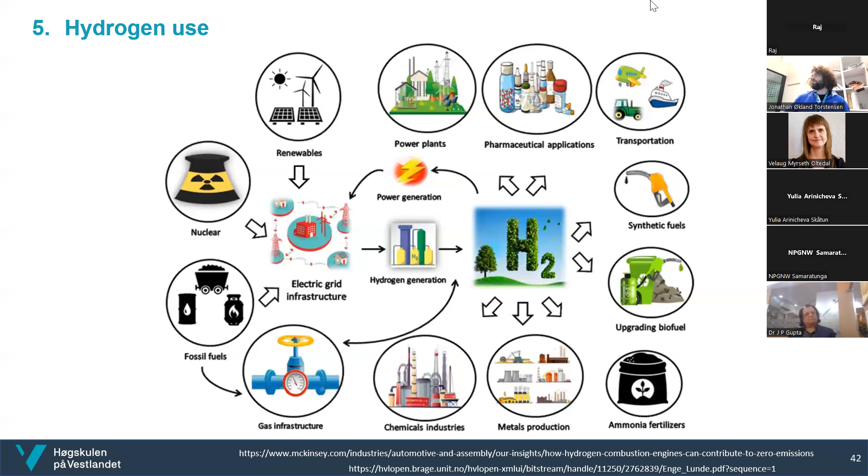Okay, let's just stop for some time and reflect on why we want to use hydrogen. So what we have seen up until now is that it can be produced if we want to from completely renewable energy like wind or solar coupled with an electrolyzer. In that context, it's CO2 free, and it can be a nice battery for wind and solar power harvesting.

It's complementary to electricity in the sense that you can use electricity to produce hydrogen, and we'll see later that you can put hydrogen and oxygen into a fuel cell and make electricity again. It has a high weight-based energy density, which is good for us.

But are there some issues? So, for instance, how do we secure the power to produce hydrogen, the electrical power, if we want to use a renewable method? And even though we will use a fossil method, how do we really make sure, because we don't have unlimited natural gas, which Yulia showed was one of the ways of producing it. So how do we make sure we have either natural gas available, or if we want to leave that track forever, how do we make sure we have enough power? Because power should go into the grid if it's needed on the grid. We should only use it to produce hydrogen when we have a surplus of power.

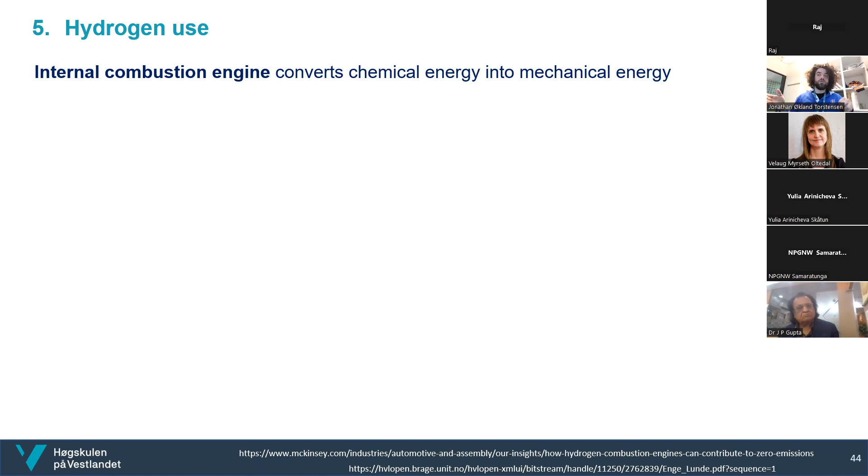If we're going to use it, we'll just briefly talk about how we can use it to generate electricity or in the means of transport. So one possibility is obviously to use an engine. Today you have hydrogen engines and you have ammonia engines, and the point is that they can be used as a conventional engine in a sense. If you design an ammonia or hydrogen engine, you need to design it differently, but the principle is the same: you put in your fuel and you get energy to drive your engine from the fuel.

So a hydrogen engine - what we have done today is a lot of rebuilding of conventional engines. The idea is that you can have a combustion reaction with hydrogen and oxygen, and obviously in this type of engine, your exhaust is water.

It has been shown that it works well, but the problem with this type of engine is that in a lot of cases it will generate a lot of heat, because hydrogen combustion is really intense. And what's the problem with that? The problem is that you can get the formation of NOx, nitric oxides, which are also greenhouse gases.

So even though the reaction itself is harmless - hydrogen, oxygen burns and you get water - the temperature and the fact that you have nitrogen present, if you use air, can lead to the formation of new greenhouse gases. And even though your starting point H2 is a green chemical, there's no carbon here, it's not petrol or gasoline, the efficiency is comparable to a regular combustion engine, which we now think has too low efficiency in this new green transition.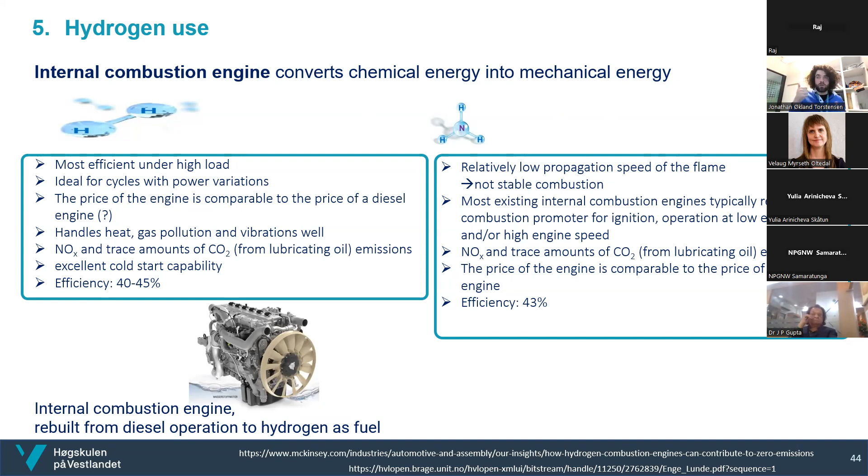In the case of ammonia, you also need to work a bit to get it on fire, so to say, so these engines are custom built for ammonia. And in both the case of hydrogen and ammonia, you need to be careful when you make your engines, because ammonia is highly corrosive, and hydrogen can lead to embrittlement.

Another option is this fuel cell option. And what is good with this is that, at least for the low temperature kind...

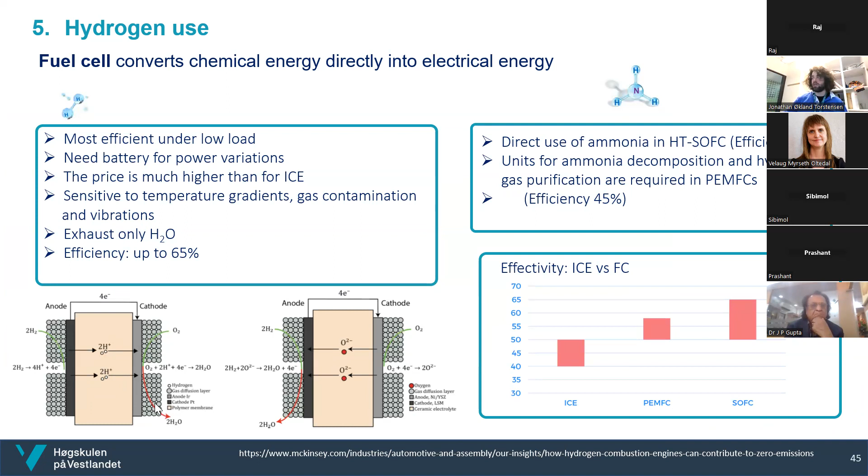So obviously the question is, why didn't they? And the reason they didn't was because the steam engine was much easier to fabricate and use than a complicated fuel cell. In general, electrolyzers and fuel cells are really, really complex structures. So in the 1800s, the engine won, and now we are kind of making the fuel cell reappear and take the place of the engine, or at least the engine that runs on fossil fuels.

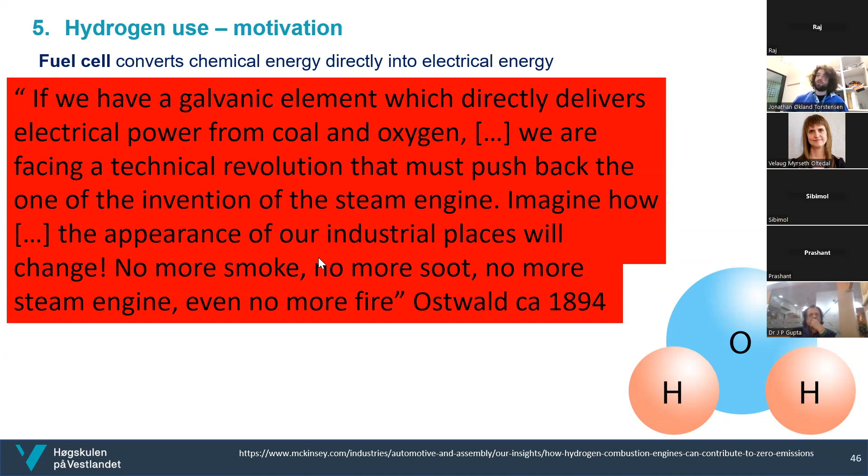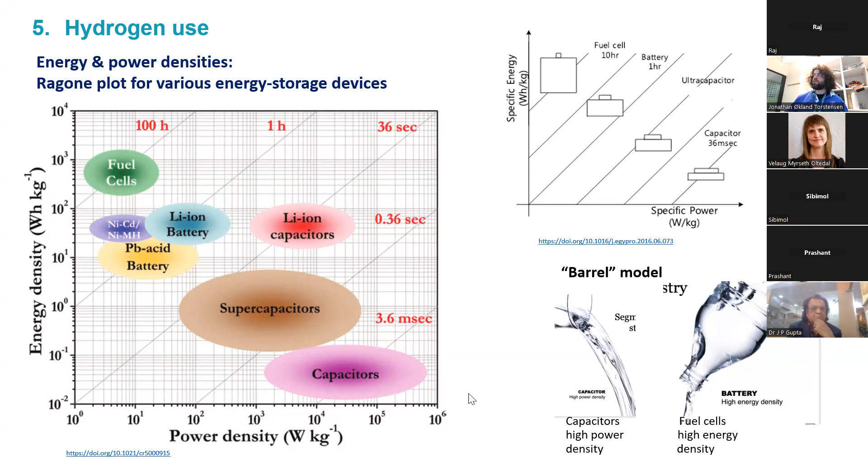So if we look at different types of cars as a point of use, we could have electrical or hydrogen cars. The thing with electrical vehicles is that the efficiency is typically much better, and this is why we want to use battery cars. At least in Norway, we use our hydropower and have a big electrical car industry, which has partly been supported by the government. There's a lot of reasons, but one of the good reasons is this energy efficiency.

Okay, we can also use a hydrogen car. Hydrogen cars in Norway is difficult because we don't have sufficient filling stations. But if we look to Europe, we have a lot of trucks around Europe. At this point, we have 27 in Germany and 47 in Switzerland, for trucks. The idea is that having hydrogen-driven vehicles is easier in Europe compared to Norway.

The question is, can we use hydrogen also for other types of transport? Obviously we can use it for ships, like Dylan said. We can use liquid hydrogen in the passenger ferry, but we might also be able to use it in airplanes. Airplanes right now are going through the same transitions as trucks and cars have done, and also the shipping industry. They're trying to look into new fuels. Liquid hydrogen will most probably be the dominating aviation fuel in the future.

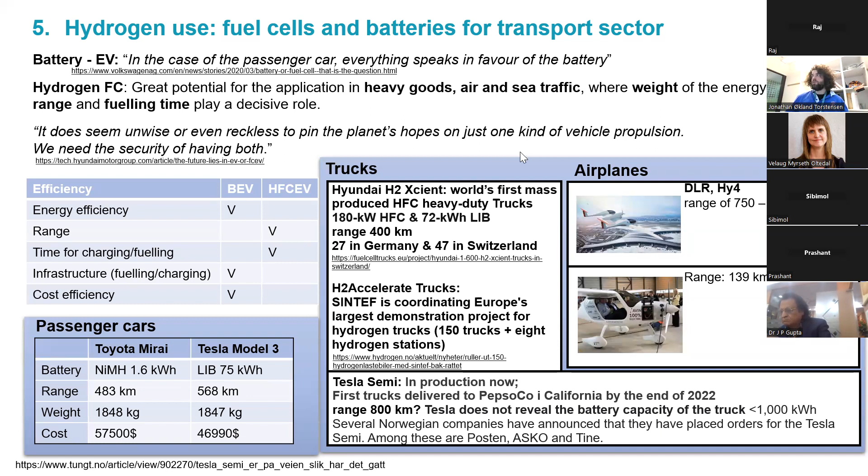Why do we want to have a combination of batteries and hydrogen in our systems? We want them because we want the fuel cell to live as long as possible. If we have a hybrid vehicle, we can use the fuel cell in a very friendly manner. We can have it operating at constant load, and fuel cells are particularly interested in operating at constant loads—they do not really handle load variation well. By using it together with batteries, we can have the battery do the peak shaving. They can do their work when we have the need, for instance acceleration, and they will protect the fuel cell, because if the fuel cell needs to go up and down, it will be destroyed faster.

If in a system we want to use fuel cell and batteries, we have the problem that it depends on your driving pattern, and how much you use your vehicle. For instance, if you have a truck, your system will look different than if you have a car that drives on small streets. To optimize this battery-hydrogen system is an ongoing research area we've been working a lot with, and the same applies for the maritime industry. If you want to put a fuel cell on a boat, you can use advanced models to predict the load in the future. In this HyValue research center, we look into how to predict the load that the boat will experience in the future, because if we know how much load we need in the future, we can optimize how we run the battery and fuel cell system.

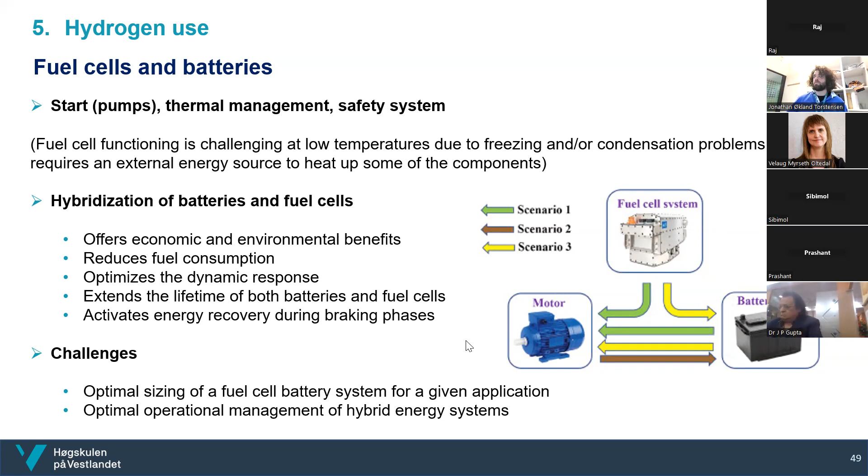Finally, I want to bring your attention to the fact that hydrogen is not only a fuel, but also a chemical. This is a titanium oxide power plant in Norway, located inside a fjord, where they produce titanium oxide, which is a pigment used for instance in white paint. Right now they use CO as a chemical to make it, but they've received money from the Norwegian government to try to replace it with hydrogen. So the chemical you'd use to start with is hydrogen, and you should be mindful that hydrogen is not only used for transport, it's also an important chemical.

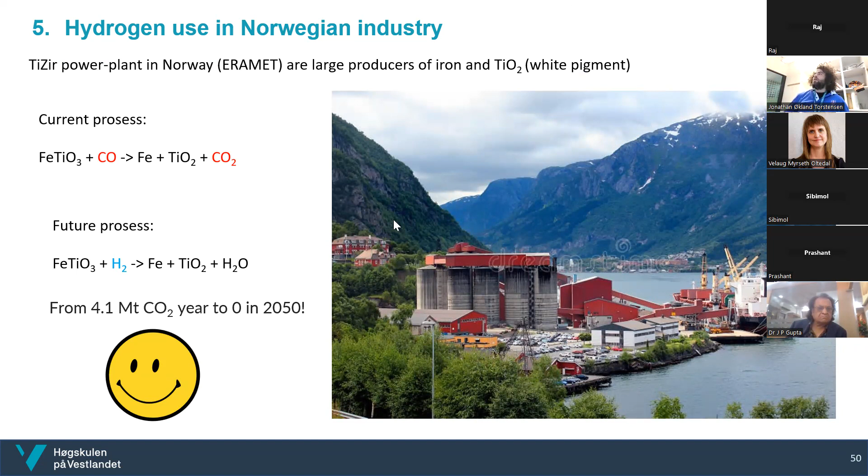So now we can look again at our pros and cons. We can add the fact that hydrogen is not only used for transport, but can also play a role as a green or emission-free chemical.

Again, we have some energy loss during use. We stopped last time with proper distribution, but now when we talk about use, there's an energy loss. An engine has an efficiency of 43%, or a fuel cell has an efficiency of 65%. That means you lose about 30% of the energy stored in your hydrogen when you use it at the end. So these efficiencies matter, and we will lose some energy when we use hydrogen. Also, hydrogen fuel cells, ammonia engines, or hydrogen engines are at this point more complicated than conventional engines. This is an inherent problem we are trying to solve with hydrogen technology.

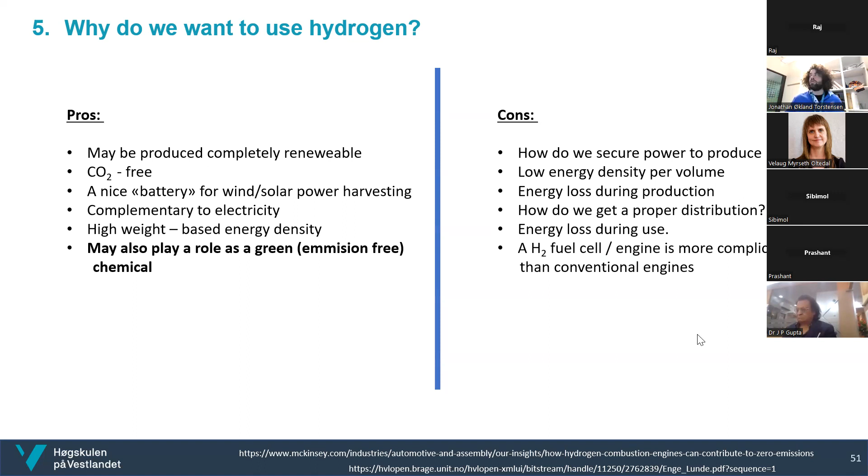We are nearing the end, and I hope I can tempt you to study this further. We are planning, as Dilan said, a hydrogen course for managers and administrators. Now you've gotten a taste of everything in a very short period of time, but imagine if you did this again using six times as long - you would better understand the things we've discussed today.

In this course, we'll talk about hydrogen's role in the green transition, and all the types of hydrogen: compressed, ammonia, liquid - how we use it, when we use it, how we produce it. We'll also go into more applications of hydrogen technology, and a topic we've touched today but not nearly enough: how do we use hydrogen and its carriers in a proper, safe manner for you, so that, for instance, if you have it on a boat or in a car, it's not dangerous.

If you take this course, we will also discuss whether there are hydrogen regulations and laws in India. I hope it will be partly physical, that I can come to India or Sri Lanka and start the course, with the rest being digital. You should be able to choose either getting credits or a diploma.

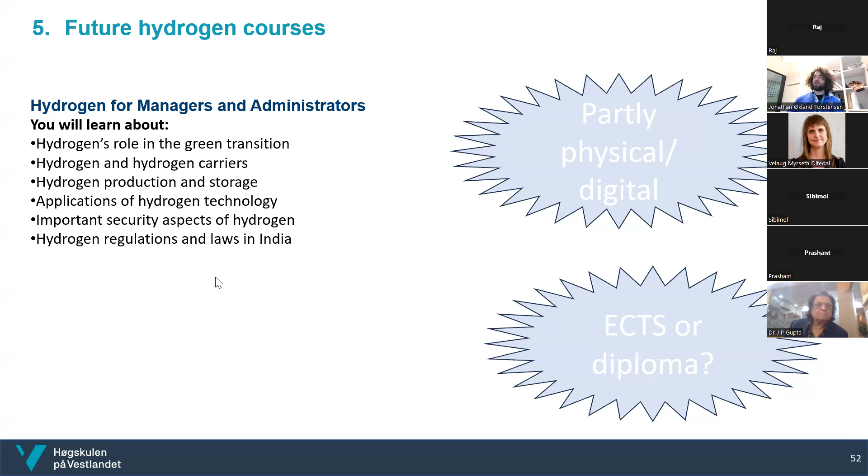I just want to conclude and say I hope you found this presentation useful and learned a bit more. Maybe think about in the future how we can make hydrogen technology sustainable in the green transition. I'd like to thank everyone for your attention, and I'll give the word to the organizers.

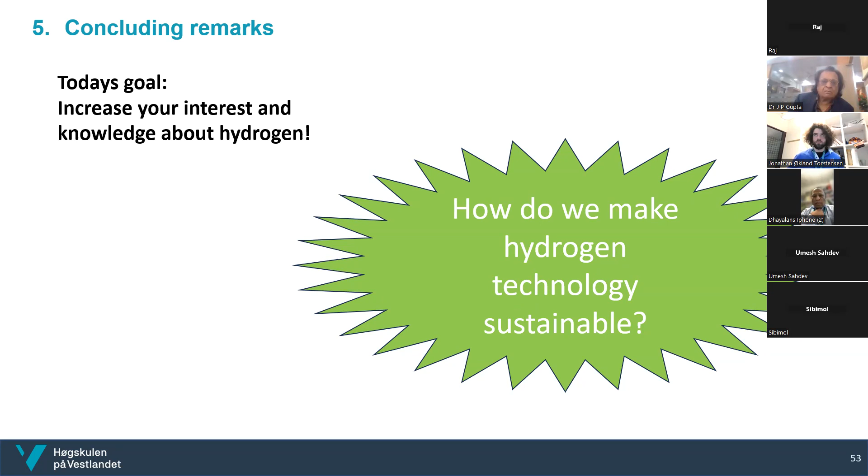Sibimol? Devi? Yes, sir. Is there any more session from your end, Jonathan? Yeah, I think we will have a techno-economical session after the break. I think if we have time, we will have a break now. Yeah, we will have a break now. Devi, we'll have a break now, 15 minutes, and then we will join for the question and answer session. We also have a session with Uda Maria, isn't it? So we'll meet in 15 minutes. Fair enough. Devi, can I leave? Yes, sir. Okay. So we will meet in 15 minutes from now. Thank you. Sure, sir.